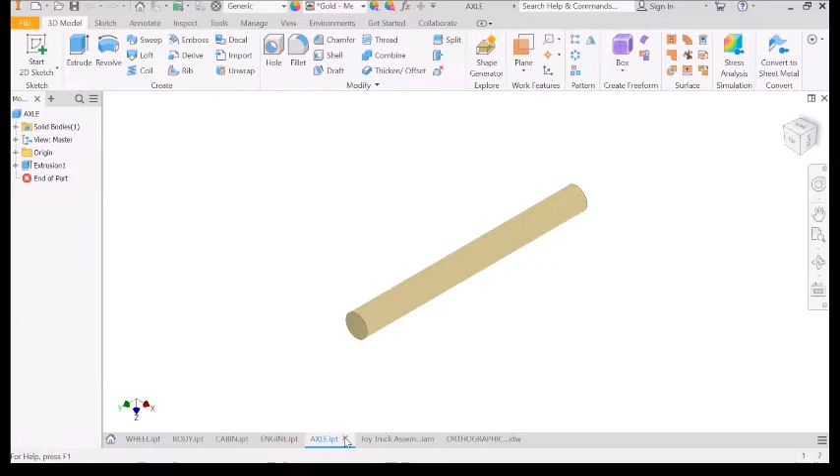So we've got the assembly just here: we've got the axle, the engine, the cabin, the body, and the wheel. We just need to model one of those, and we can insert it 4 times, so we end up with this as a finished product.

To begin with, you need to come up to File and click New. I'm going to start with the metric tab. If you haven't got that open, just open up English US, come down to Metric, then Standard millimeter, and click Create. I'm going to start with the body, sort of like the main part of the toy.

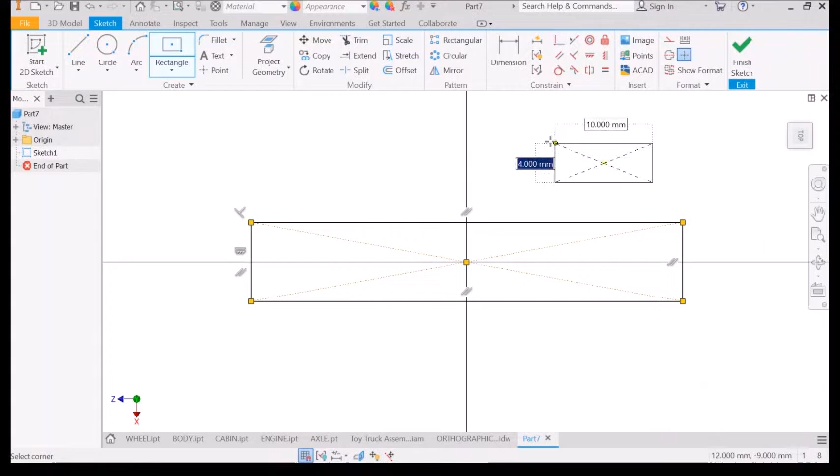So I'm going to start a 2D sketch on this ground plane, and choose this rectangle here, the 2-point center rectangle. I'm just going to drag it from the point of origin out to the right here and drop that off. If it wants to keep drawing more rectangles, just press escape, or come up and click here to turn off the rectangle tool.

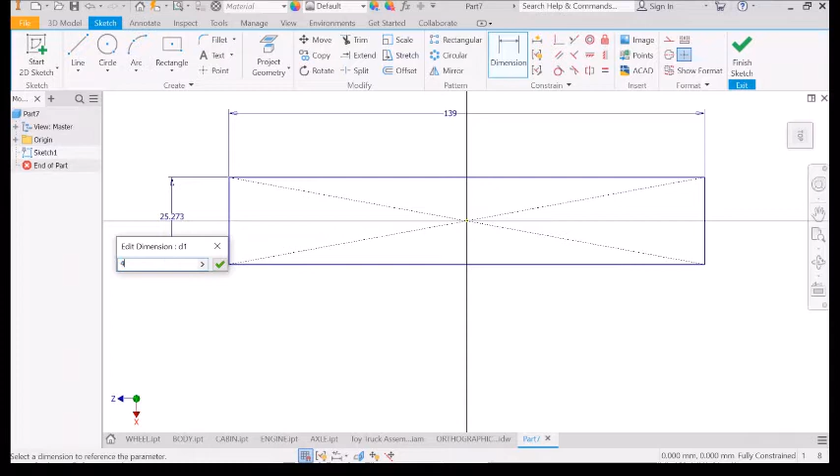Now we need to place a dimension on the length and the width. The length is 139 millimeters, so just type in 139 and press enter. That's gone off the page, so use your mouse wheel to scroll out, and put a dimension on this side over here - this one's going to be 42 millimeters wide. Type in 42 and press enter, and then just scroll out.

If you click your mouse scroll wheel, you can actually drag that around the screen and zoom in and out. Just have a go at that so you get used to navigating around on the page. Then click the big green tick up on the right hand side to finish the sketch. That's basically now a 2D rectangle to the right size.

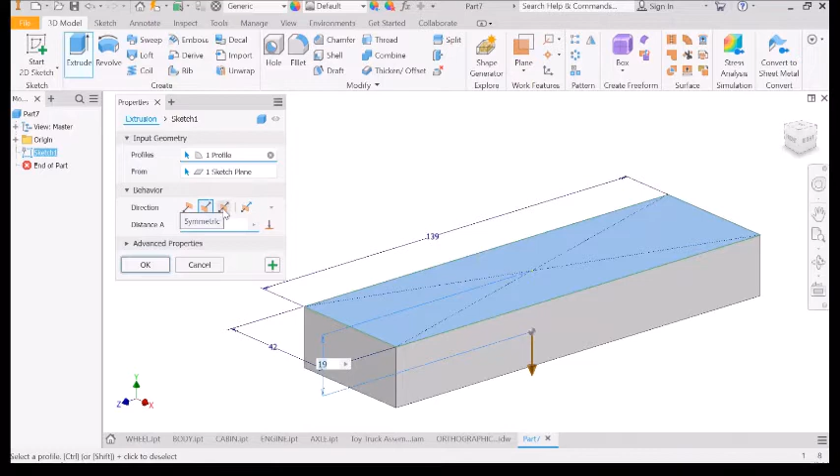What we're going to do now is just extrude that up. The height of the body is 19 millimeters, so type in 19. Basically I'm modeling symmetrically for when I want to do advanced modeling down the track, but it doesn't matter if you have it selected as one way or below the work plane. For future reference though, symmetric is very handy when we're playing with hidden work planes.

Alright, so that's the block. There is a little cutout bit if you have a look here where the cabin comes in - it's got a little chiseled out section. To do that, simply go back to our new design file, select a surface, right click on that surface and click new sketch.

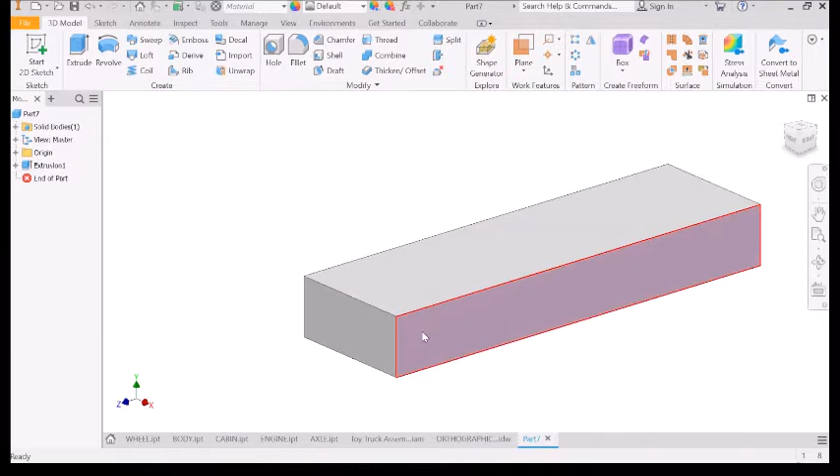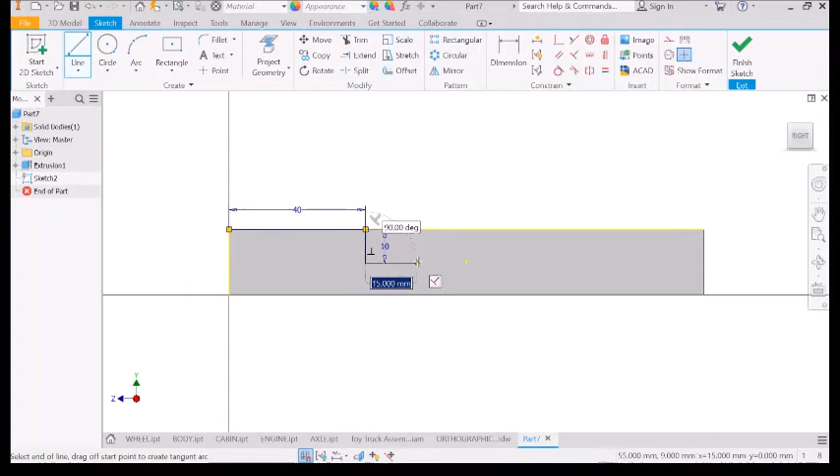From here we can simply measure in 40 from this corner. I'm going to get a line, snap onto that corner so it goes green, come across here and type in 40, enter. I'm going to come down the height of 10, enter. I'm going to come across 15 and go up to the line here, then come back to this point.

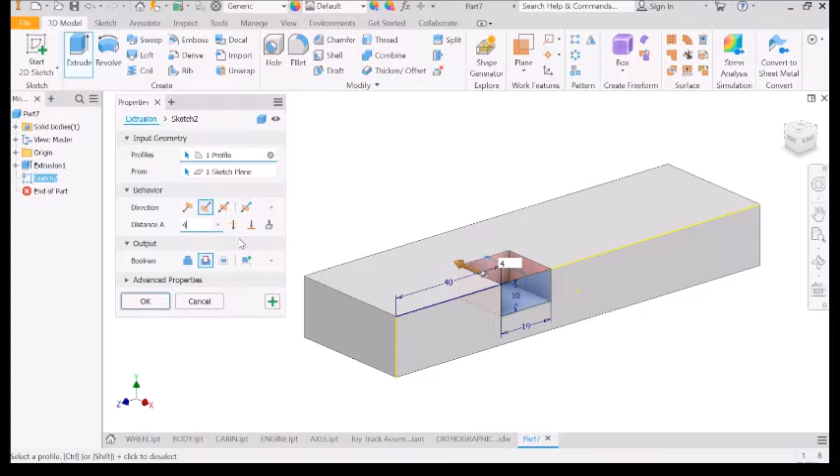Now I'm just going to press escape to turn that off and click finish sketch. All I'm going to do now is just extrude that little rectangle in direction 2 - change it so it's going through, and change the distance from 19 through to 42, so it cuts that all the way out.

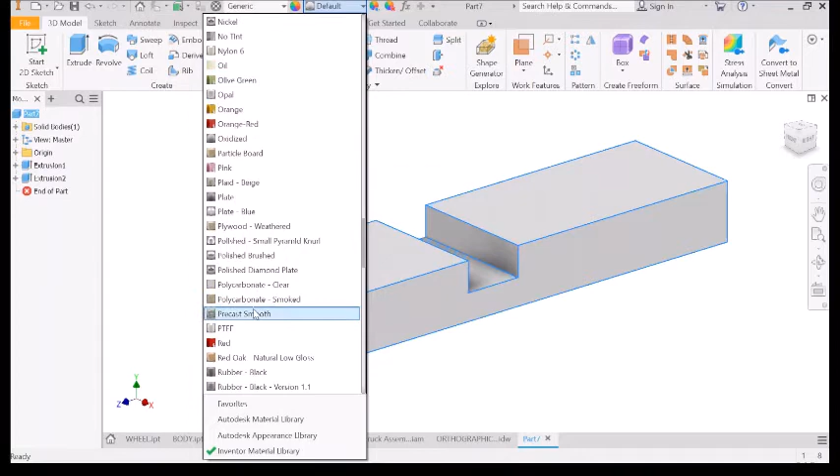So it looks a bit boring that it's just a grey material. What I'd recommend now is just clicking on part number 7 there and changing it from default material, and you might find a finish that suits your model. If you scroll through, there's plenty of different timbers there - I'll try this red oak natural low gloss, and the other thing I'll do up here is call this one body.

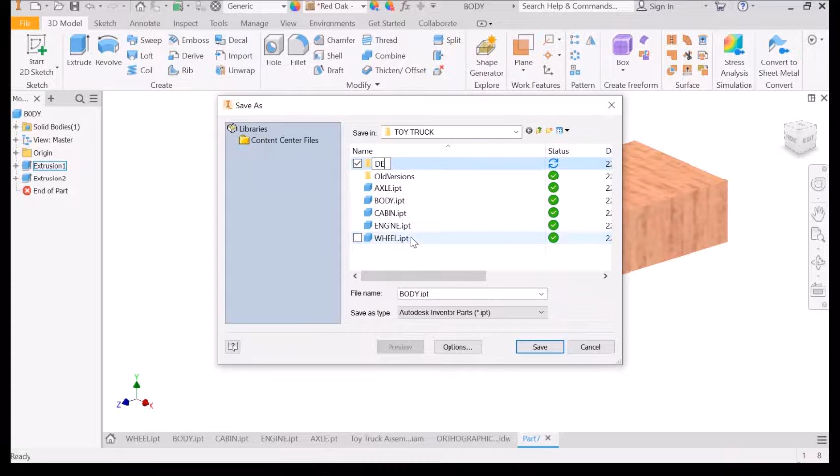Okay, just save that. Go to File and Save As, and type in 'body' there. I've already set up these ones just before I was practicing. So just create a new folder and call it demo toy truck, easy, then drop it into your VDT folder and save it.

Now that we've got the body, the next thing I'd probably go on to would be the cabin. So start a new design file, make sure you're in metric and millimeters, and create. That one's another piece of timber, 42 by 19.

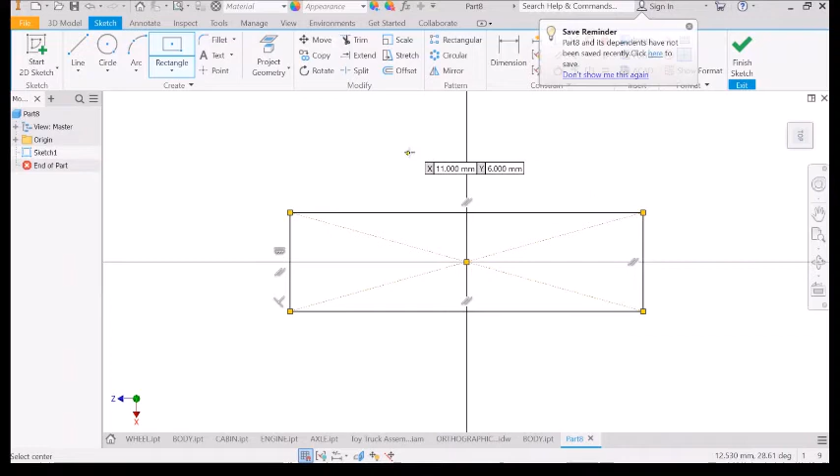I want to choose to draw in the ground plane, starting with the rectangle again, snap onto the center and drag that out. The size doesn't matter. Press escape to turn off the rectangle tool, choose dimension, and bring this one up. The height of our cabin is 60, and the width of our cabin here is 42.

Go finish sketch, and then extrude that one 19 millimeters. Okay, so that's the cabin.

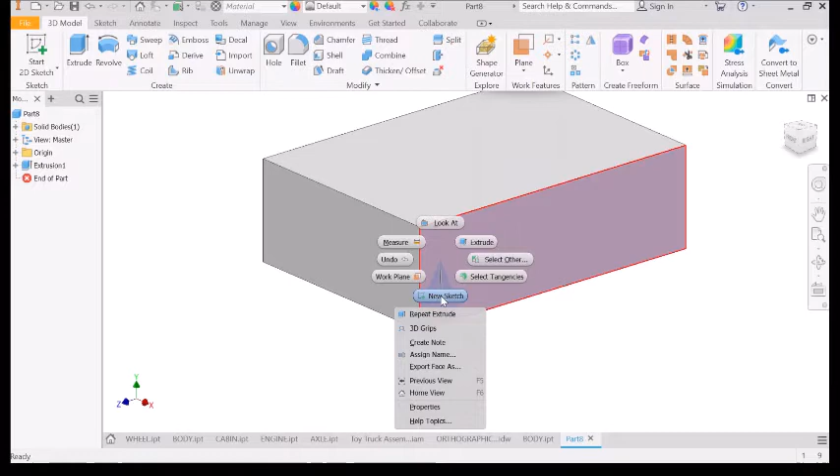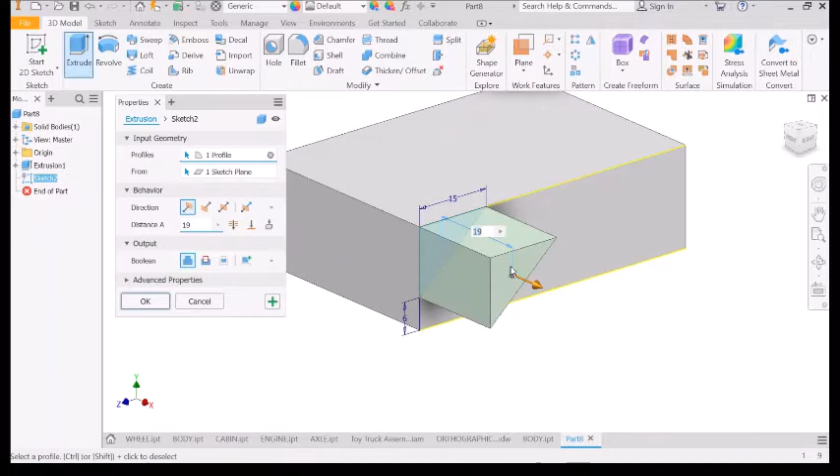There's a little cutout section, 6 mil on one side and then 15 back. To do that you could extrude a triangle off, do an offset chamfer, or draw the side profile and extrude it - there's lots of different ways. But to keep it really simple for beginners, I'm just going to measure a height of 6 up from here, come across and down a height of 15, and draw that triangle back in - that's the angle I want to cut off. So I'll use the extrude tool this time, switch the direction, and make that 42 millimeters.

Check it out, there's the cabin. Now just go up to the part, rename it since it might be part 8 now, and I'm going to call this one the body - actually I'll put it all in capitals, looks neater. Enter. Don't forget to select body so it selects the entire model, and choose a colour.

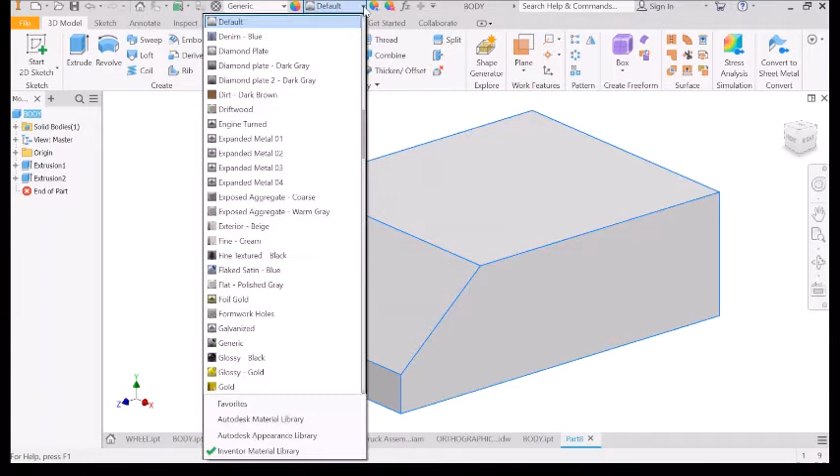Alright, I'll try another type of timber. That looks a bit funny - let me scroll through and find another type. There's some oaks that look good, white oak natural, or ash, white ash. That'll do for now.

So if I go back to my toy truck assembly, I've now done the body and I've done the cabin. The next thing I'm going to do is the little engine.

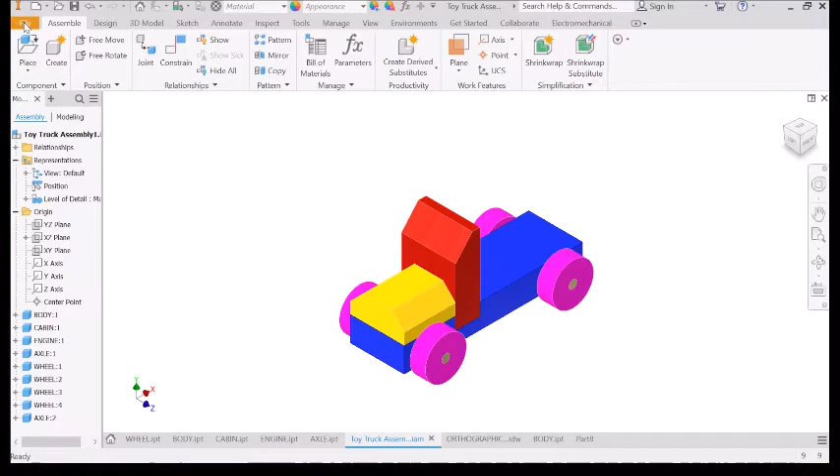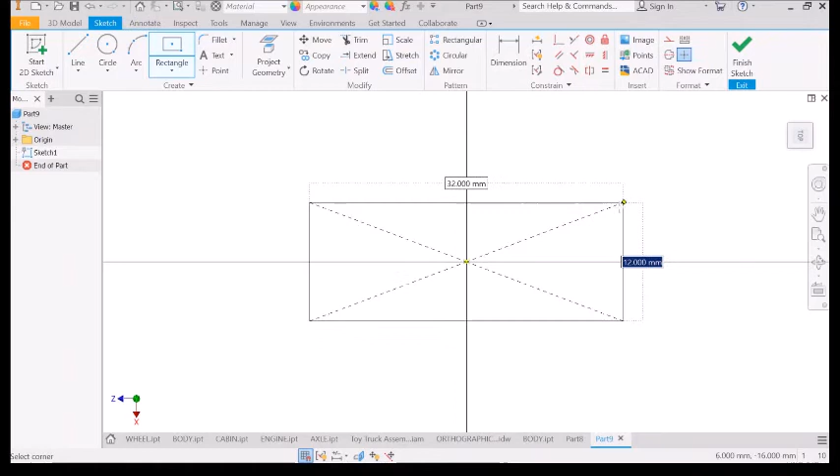Start a new file, go new, click on metric, click on standard millimeter, and create. Again this is a simple block of timber, 42 by 19 rectangle. Start on the point of origin with the rectangle tool, snap on the center point, drag out any old rectangle, press escape again to turn off the rectangle command, grab the dimension tool - the length of the engine is 42 mil long, I'll make that 42, just double click on that.

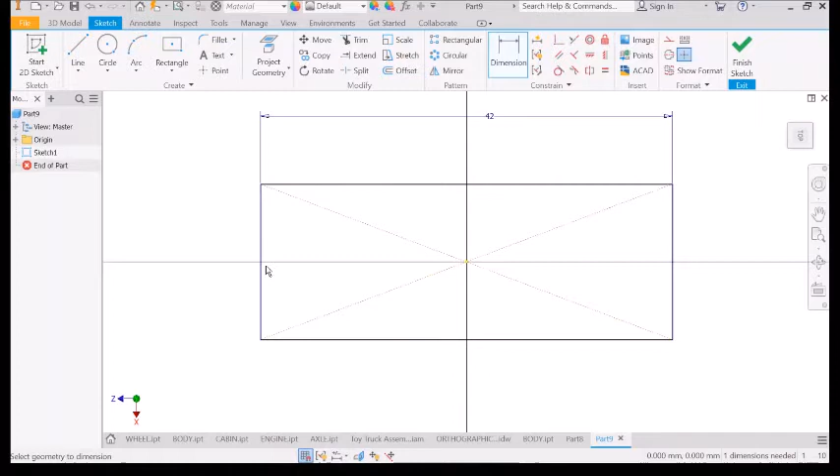Okay, 42 wide, and the length is 60. Alright, that's a bit easier - so 42 by 60 rectangle, and extrude that up.

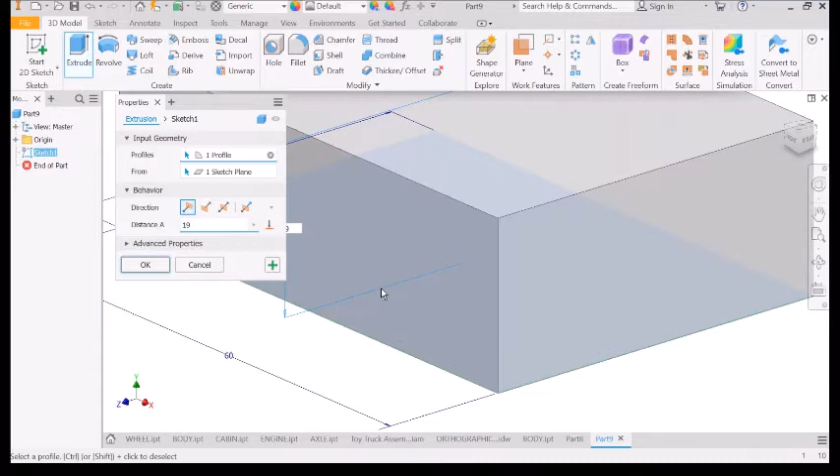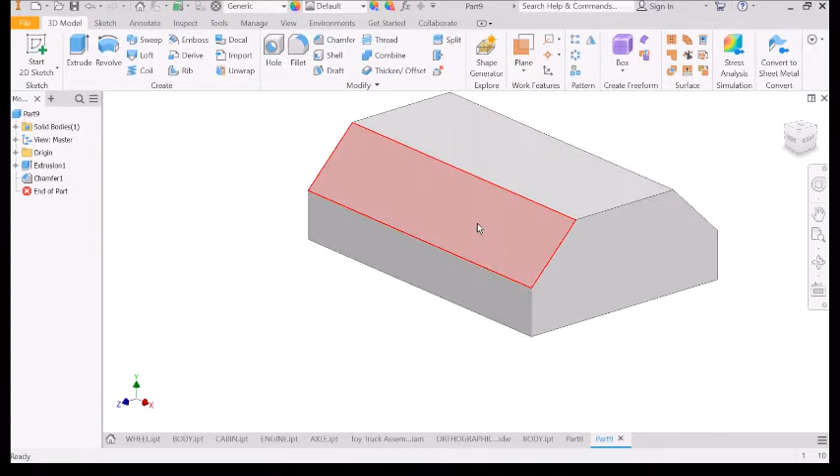That looks pretty good, go OK. That's our 10 - sorry, change that to 19, so the height now is correct, it's 19 high. This one's got a chamfered edge on both sides, and they're 10 mil. So select this edge, select chamfer, change that 2 to a 10, drag that window off, select that edge, and go OK. Now we've got a chamfer as well on both sides.

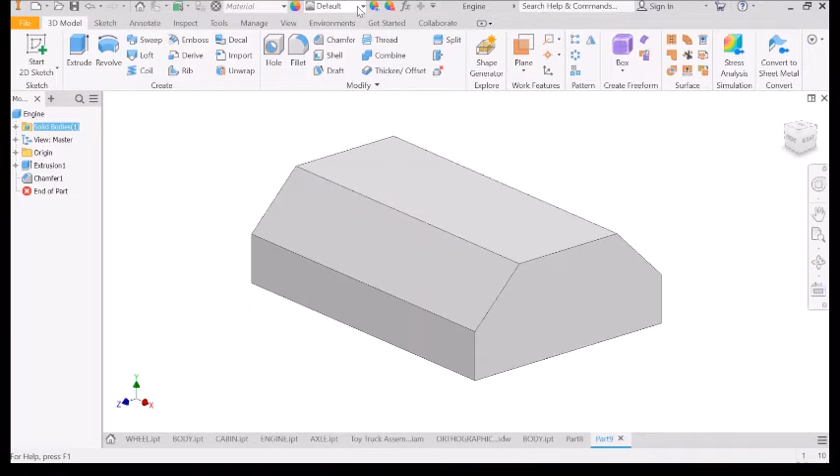Changing the part name would be the next step, and that one is your engine - I've got caps lock on here, E-N-G-I-N-E. That'll do, and I'm going to make that a different colour from the default grey, so I might choose a timber colour from down here - red oak as well, very nice, a bit shiny. Alright, and save that one as your engine.

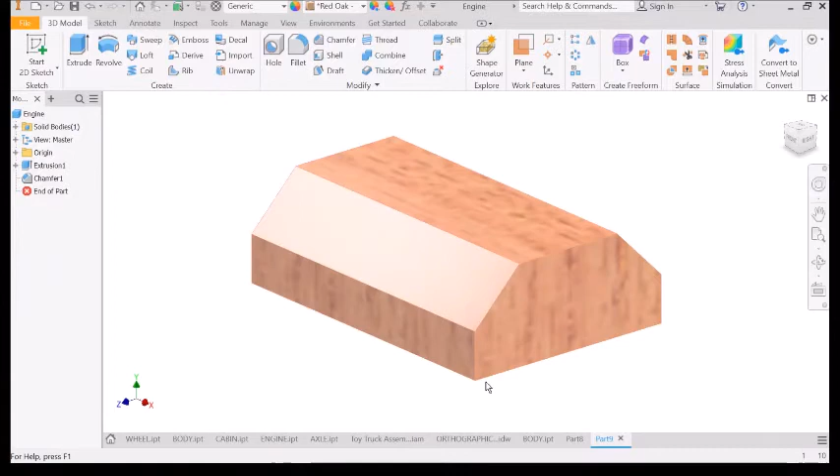And I just realised I've not saved part 8. That was the cabin. So file, save as, and there's the cabin.

Alright, so we're cruising nicely. Got our cabin, got our engine, got our body in our orthographic. So we've got that one, and that one drawn. Next up, I might draw one wheel. You don't have to draw all 4, just draw one, and the axle.

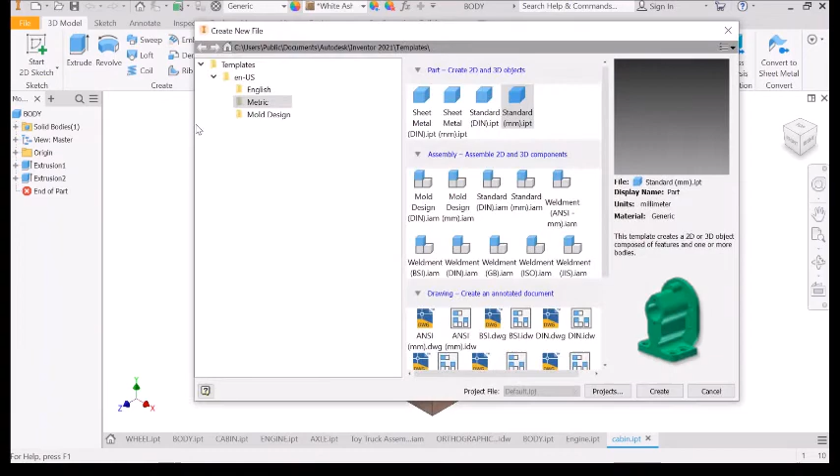So it's pretty easy. You just go to File, New, Metric, Standard Millimeters. I'm going to model up the wheel now. So the wheel, nice and simple.

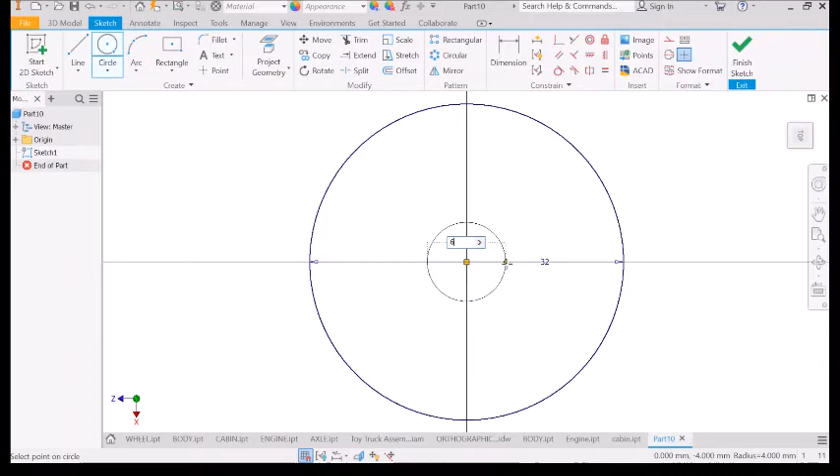Start a sketch, click on the ground plane. I'm going to use the circle and draw that circle out. The wheels I've chosen are 32mm, so I'll actually make them with the hole saw. So draw the first circle 32. The dowel that's going to go through it is a 6.5mm dowel, so I'm going to go 6.5, enter.

Go finish sketch, and I'm going to make my wheels out of 12mm plywood. So I'll go extrude, click on the profile, and change that to 12mm. Go OK. So now we've got a wheel. You can choose a part 10, just click on that again, 2 clicks, and type in wheel.

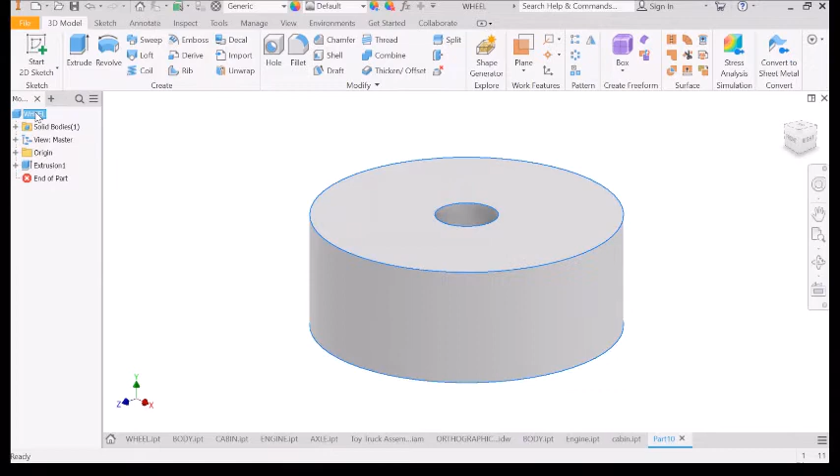And select wheel up here and select a colour. It's gold. Alright, so the gold wheels.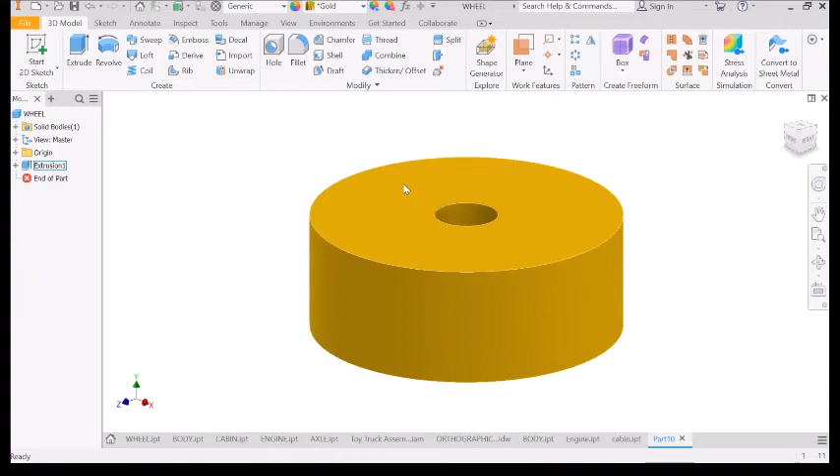The next step would be the axle. Alright, so the axle, I'll show and save part 10. I'll quickly save part 10 as wheel. So save as wheel, save, and go file, go to new, click on metric, standard millimeter, and create.

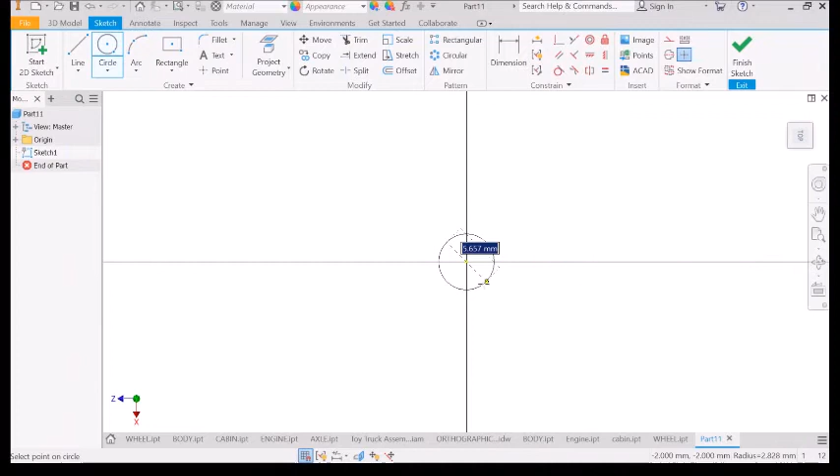And we're going to create an axle on the ground plane, and the axle is going to be a 6.5mm axle. That's what the dowel is that we're using in this instance. So as I drag my circle out, I can type in 6.5, enter, click on finish sketch, and simply extrude the axle. It says it's 67mm in the drawing, so the distance will be 67mm, and OK.

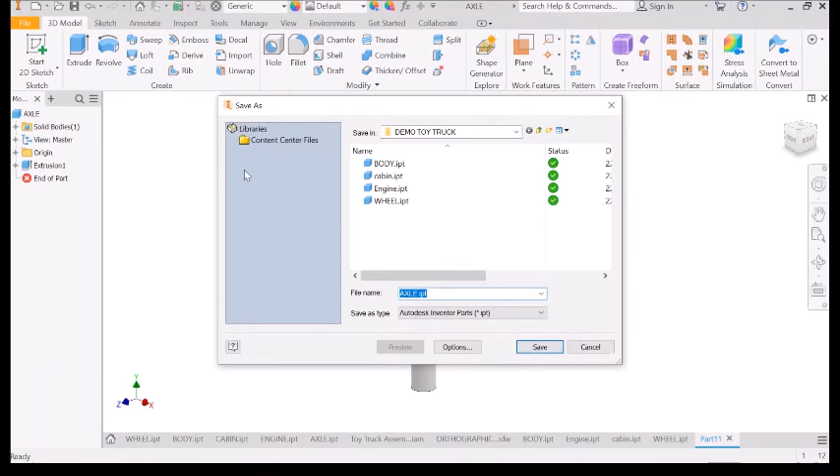Alrighty, so I just leave the axle grey because it will look like it's metal. So part 11, AXLE, and I'm going to save that now. Axle, save.

One thing I've forgotten is on the body. Where the axle and the wheels go through, we're going to need to make some holes for the wheels. So click back on down the bottom tabs here to body, select this surface, right click, go to new sketch, and I'll get you to grab the line tool for me, go to the bottom corner, measure up a height of 7mm.

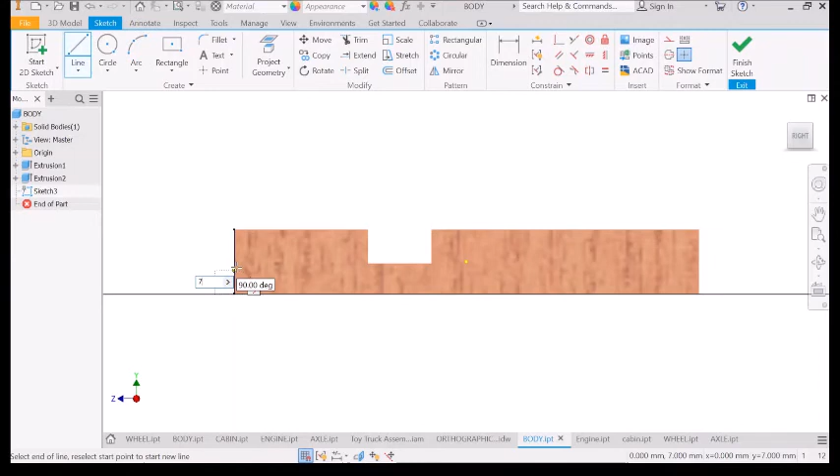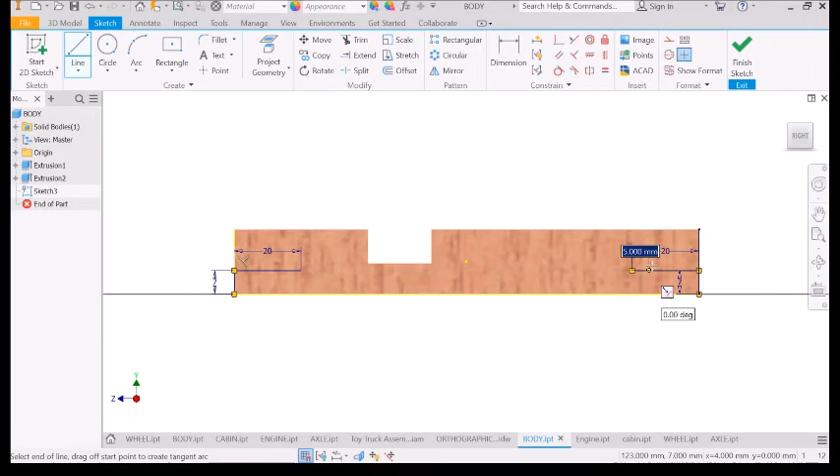And then come in a distance of 20mm, and do the same on the other side. So I'm just going to press enter, that turns that off, and then enter to turn the drawing line back on. Up on this side, 7, and in 20, and then just press escape to turn off the line tool.

Choose the circle tool, and I want you to make this one a little bit bigger so that the axle will spin. So if the dowel we're using is 6.5mm, make the hole 7.5mm. So it's just a little bit bigger, and that will help the dowel spin around inside there. So that's 7.5 on both instances.

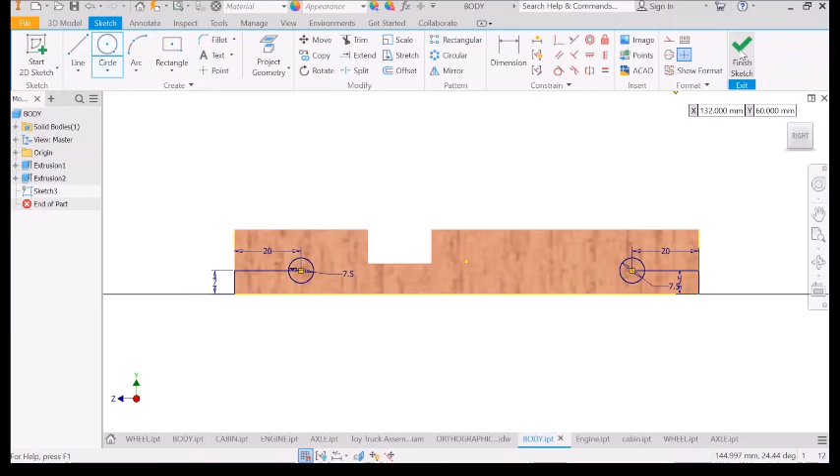Finish the sketch off, and then we need to drill those holes out. So I'm just going to use the extrude tool, and I'm going to select profile. So select the profiles. You might have to zoom in a little bit so you can see. There's one, and there's two.

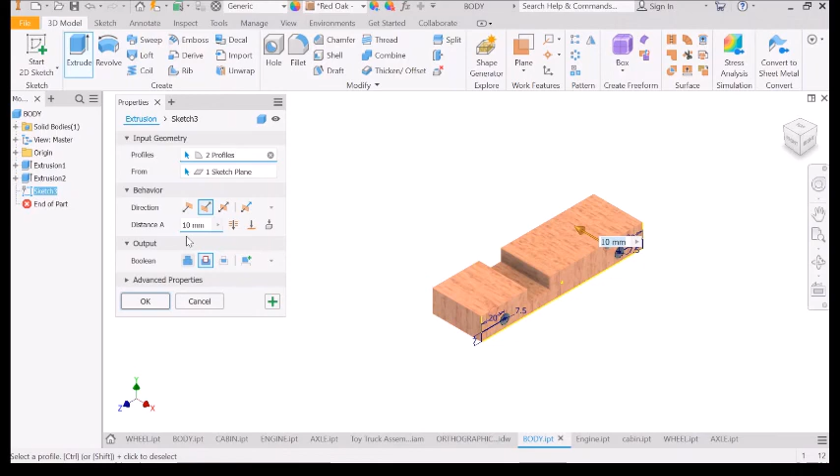Now I've got a little problem here, they're going the wrong way. So you simply click on flip it around, and they're not going through the whole distance, they're only going in 10mm it says. So change that 10 to 42mm. There we have it. Okay.

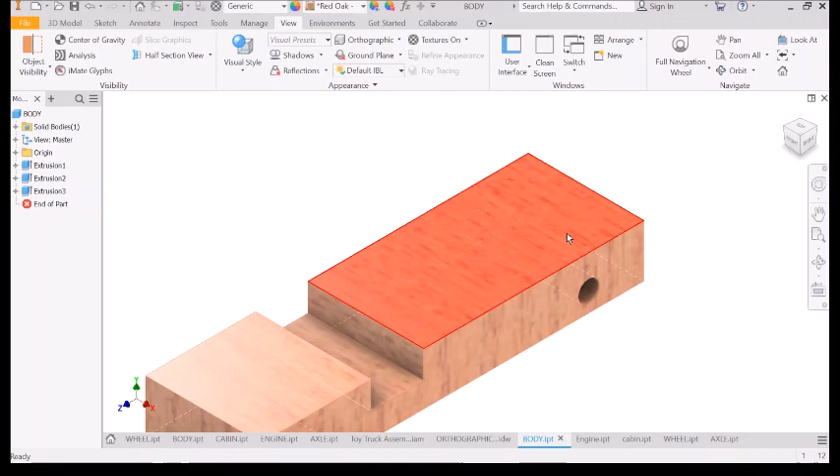You can't really see that it's going through, so if you wanted to, you could actually go up to your view and say visual style, and say shaded with hidden edges. And if you look carefully now, check it out, you can see the dashed line shows the hidden detail. Alright, so that's pretty cool.

So now, if we have a look back at our files, we should have all the parts to start an assembly. Alright, so we've modeled up all of those parts now. The next video, I'm going to show you how to assemble it and put it all together. Alright, thanks for watching.